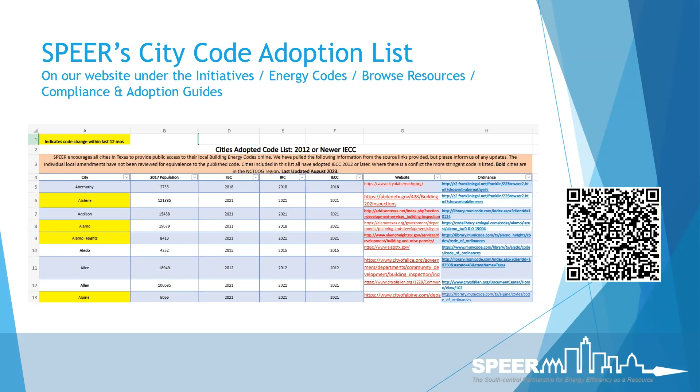So Texas, as I said earlier, is unique. We have different pathways than other states. Some of it's been put in legislation for us from House Bill 3215. We still have prescriptive. We have the total UA alternative, which is a building shell, just trade-offs for windows and insulation values to reach compliance for the code. You have total building performance. We have the ERI, which is just a sliding index, a 2-digit sliding index that gives compliance for the code. We have Energy Star, which is also in the legislative words that says it also can supersede the code.

Right now, currently, Texas is on 3.1. If a builder is doing Energy Star for the 45L tax credit, which we'll talk about a little bit later, in order to continue and get their tax credits, this is my understanding, and if someone's on the call and they want to correct me if I'm wrong, the house has to be completed prior to January 1st of 2025 to get that tax credit. If you have a project that's starting and it goes beyond that date, you'll have to already be on 3.2 for compliance for your tax credits. That doesn't mean a city has to say that they're not compliant. That just means that if they're going to get the tax credit, they're going to have to update to 3.2 if it's going to go beyond the January 1st date.

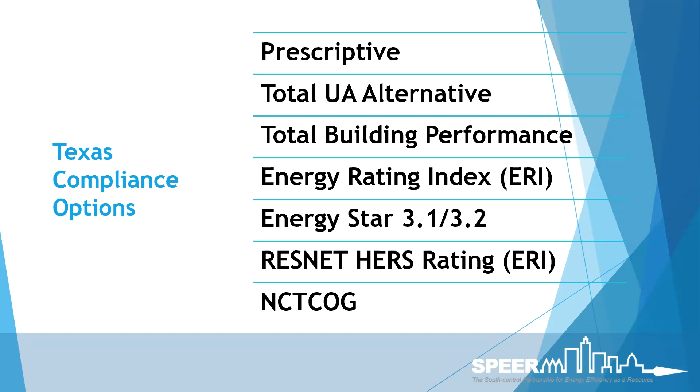We also have the RESNET HERS rating, which is technically the same thing as ERI. And then we also have the North Central Texas COG, and we'll talk a little bit more about that later. So as you can see, we have way more compliance pathways through the code than is just written in the book. So Texas gives that flexibility.

As I just said a minute ago, House Bill 3215 did allow the Energy Star and RESNET HERS index to be a compliance pathway. I'm not going to go deep in the weeds here, but there's still some confusion about, well, if the city has adopted 2021, how are we going to make sure that Energy Star is compliant? Because Energy Star 3.1 has a backstop that's older than the 21. We have some cities that are pushing really hard back, saying, I don't care that you're Energy Star, you're also going to comply with 21. That adds a lot of confusion for the building industry. It adds complexities and additional construction costs. If you have specific questions about that, by all means, put it in the chat or the Q&A, or use my contact information at the end and let's discuss it in more detail.

So it always comes down to the city having final jurisdictional say. They can decide what they want to do. They can amend the code how they want. But if they've already adopted the 21 without understanding the complexity of what Energy Star does and doesn't do, and you don't already have an amendment in place, it's kind of tough to enforce that. Even though, and again, I won't go deep in the weeds here, Energy Star's checklist does show that the more stringent measures should apply. And in that wording, it should mean that the 21 requirements have to apply to an Energy Star certified home. But just about all the cities that I know of in Texas that are on the 21 are allowing an Energy Star across-the-board compliance pathway without adhering to the updated 21.

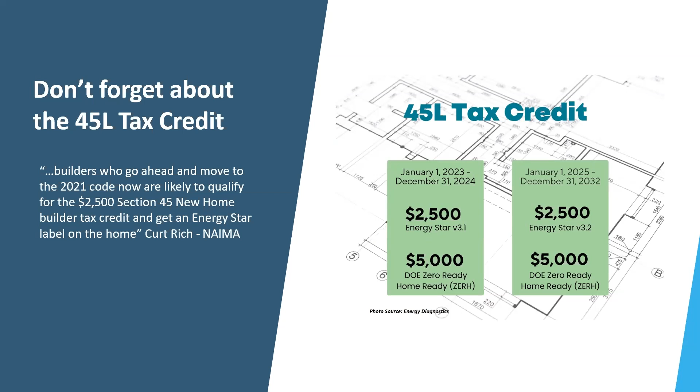They've added some flexibility in there that can actually push the builder through and still be certified. So I like to see that. But the one thing that we did ask of the EPA and just said, hey, can you help us with this? There's confusion in Texas with the 21 and, you know, what compliance measures do we need to do? They did some analysis. They did one in Houston, one in Dallas, one in Amarillo. They did both gas and electric only.

So even though they're not going full force and being enforced to do the 21 requirements like R8 ductwork and additional measures of the 21, they're still more energy efficient than a code built house, and that is the older 3.1 version. Even though the backstop is 2012, it's still showing that it's more energy efficient.

We picked those three cities. They are a good representation of a dry climate and then a humid climate and then a very humid climate for climate zone 2. And so 3 different climate zones were represented there.

But that gives us a good indication of, again, we can talk about this offline with city specific, but if you're in the 21 cycle already, there's really not a reason to force a builder that's doing Energy Star to go up to the 21 level yet. They're going to get there anyways with the 3.2 if they're going to continue the tax credits. So we have a very short window of how do we navigate this?

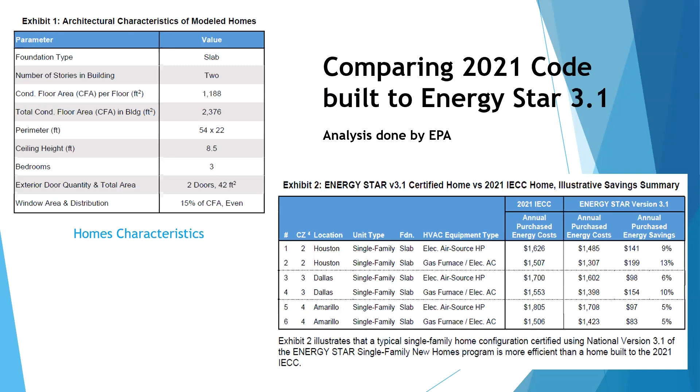But with all that, the HERS, the ERI, the performance, Energy Star as well, you're going to need software to do that. So prescriptive and total UA, you can use a REScheck. That's the free one that's online.

There's always questions that come up to say, well, who's allowed to do that? Can it be the builder? Can it be a third party? Can it be the HVAC contractor? Again, that comes down to the city's interpretation and enforcement for that. It says the code official has approval of who actually does this. So if the builder, and you think the builder understands building science enough to actually build an energy model, just look at that. We'll talk about what those look like in a minute and what's important to look at for the reports. That's pretty much what some of this webinar is for today.

But REMrate, Ekotrope, they're a paid service. You have to pay a licensing fee for that. It's much more granular. It has a lot more trade-off options. So most of all the national builders will go Ekotrope and REMrate because it gets them the lowest construction cost for meeting code compliance.

REScheck and IC3, there's differences between the two. We'll talk about those in just a second. Some of the engines, the way they're built, they've tweaked them both, and so there's more importance leaning towards one way or the other. So we'll just get right into it. It's harder to explain that way, but we'll just start out with REScheck.

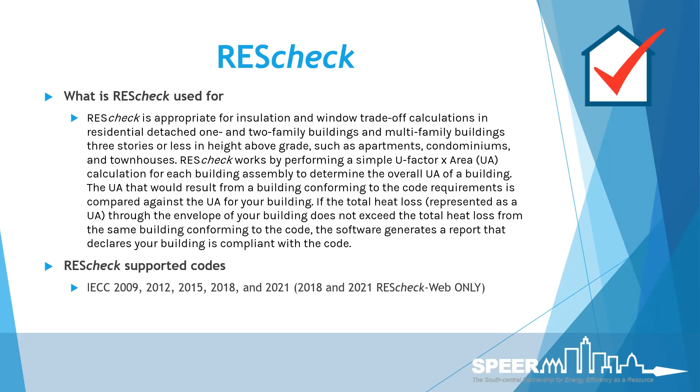That newer REScheck is going to allow you to have project sharing. That way, everyone that makes changes will be able to see it in real time with someone else making changes. But one important thing to note is this actually pulled up a notice, and I thought it was interesting to put this on here. As it says, compliance with the 2021 IECC Energy Code can be demonstrated using the total UA alternative or performance alternative. However, neither of these alternatives allow credit for high efficiency mechanical equipment.

And then in red, electrical resistance heat cannot be modeled with the performance alternative, so the total UA alternative must be used. So if someone's going with the heat pump, that changes what can be used to model this. That's why I get a lot of calls from people: hey, I'm using a gas furnace and I can't get it to pass. A lot of it has to do with the way it's being modeled and what you're actually using. I said that backwards, I believe, but if you're using a heat pump, it's getting harder to get it to pass because certain pathways won't use that calculation. So just take note of that as well.

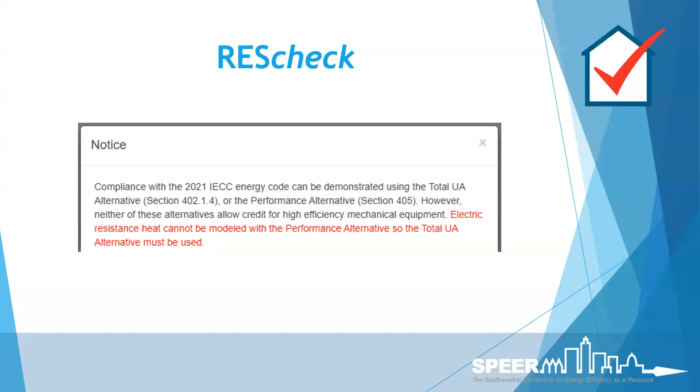So looking at the energy reports, we're going to point out what's important and, for plan reviewers and permit techs, what am I looking for to say this is right? If it has a big green bar at the bottom saying passes using performance alternative, there's still things you need to look at: is this actually the same house? Are they using the right energy code? Is the location correct? And as you see, orientation says building faces 270 degrees from north. So it's not giving an exact, it just says this is its way from north.

Looking at square footage, how closely is that correct when you're looking at the plans? Sometimes it could be off. Then it shows the glazing area, and specifically, what climate zone are you in? So if someone's doing one for Dallas, which moved in the 21 from climate zone 3 to climate zone 2, are they using the correct climate zone? Once you put location in, it's going to tell you the climate zone. But if location is off, that's a big no-no right off the bat. That's a telltale sign something's not correct.

But as you see at the bottom, it's 0.4% better than code. We'll talk about the chapter 4 stuff, but in this house specifically, I just threw numbers at it, and I'm 0.4% better than code. If that insulation is installed in the walls poorly, and I go from a grade 1 to a grade 2, this is no longer passing. Because it's that close to compliance, poorly installed insulation is now going to fail that.

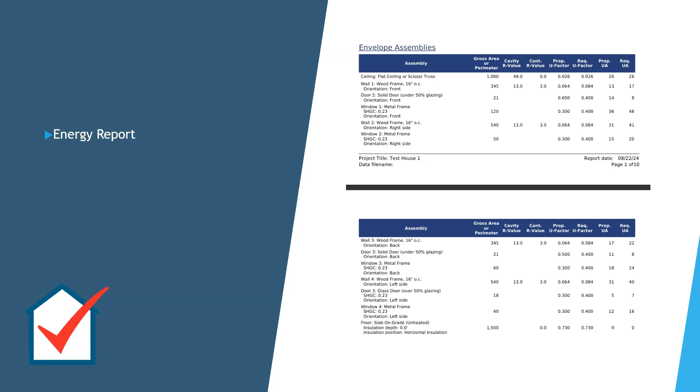Without looking at this detailed list, you just don't know. And then last thing, you can put mechanical equipment in here. Just verifying the AFUE: this is considered a gas furnace, but if the AFUE is 90% in what they installed, but they modeled it at 80, that still means the model should be updated. It's not going to fail because that's higher efficiency equipment, but is there something else they could have traded off to make the cost of construction lower?

Air conditioning, 17 SEER. I've heard a lot of times they're throwing high SEER equipment on the model, but they're not installing it because it's too expensive. As you notice here, you don't see tonnage. I've also seen where a 4-ton was supposed to be installed and they instead installed a 3-ton because they bought cheaper equipment. It's not showing it in the model. So it's something to look for closely.

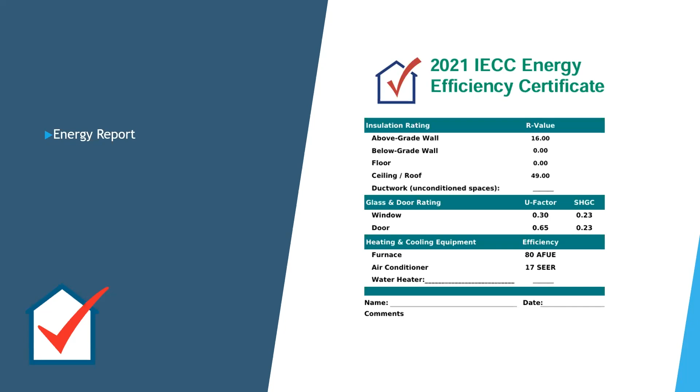And then, of course, it lists the efficiencies of the equipment. And on the water heater, it leaves blanks there so you can fill that out. So again, if you have specifics and want to go deeper into REScheck or IC3, I can help the plan reviewers or the permit techs, and we can meet online through a Zoom call and talk in depth about what's important to look at. We don't have a whole lot of time to dig through every single part of that.

But the IC3, this is Texas A&M's version. It's the International Code Compliance Calculator. It's a performance-based residential energy code compliance tool. I'm still surprised that there are some cities that have not really heard of the IC3. It's rare, but it's still out there. A lot of them know what REScheck is. They know that they accept REScheck. It's in their code of ordinances, but they're not really sure what IC3 is. It's a Texas-based thing. But what is this? What does it mean by having a compliance tool?

So it's the same as REScheck. Its one and only job is to compare the annual consumption based on the calculation that is based on the heat load in and out of the building. So you're looking at the building shell, and you're looking at heat load that comes in, and how do you condition that to offset the load coming in or out of the building, and you look at how much that annual energy consumption is and compare it to a referenced house to say, this is where it should be, this is where I'm at, am I equal to or less than, am I compliant?

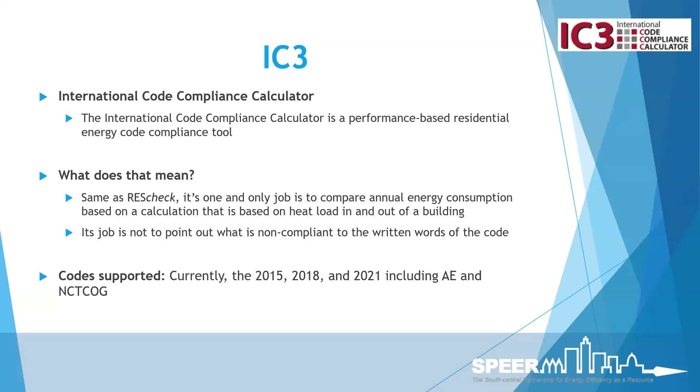And then the current codes that are supported are currently the 15, the 18, the 21, Austin Energy, and the North Central Texas COG amended code. So REScheck doesn't have that listed in its library, but IC3 does. So if you're a North Central Texas city, or any city in Texas can adopt the North Central Texas COG amended code, and you can use that, but you're going to now have to ask for an IC3 instead of a REScheck for compliance because that's in its library and has the calculations.

So with that being listed, here's kind of what we're looking at. I misspelled that, sorry. It's NCT COG. It's the North Central Texas Council of Governments. It runs analysis every time a new code cycle comes out. They create an amended code that still shows compliant. What they're really doing is tweaking numbers here and there. They're making it easier and better for the building industry to still be compliant with code, because all you're really looking at is what's the total consumption of energy when you're comparing it to a reference home, and am I equal to or less than?

So with that, the biggest changes that you see here for climate zone 2 and 3, they did move ceiling insulation down to an R42. The fenestration U factor went up to a 0.32. The wood frame walls for climate zone 3, they took it from a continuous R5 down to a 3 continuous. And then of course, slab edge insulation, majority of climate zone 3 has removed that due to an exception that says if you're in a high termite area, you don't have to do it. But North Central Texas COG just amended that out and put 0.

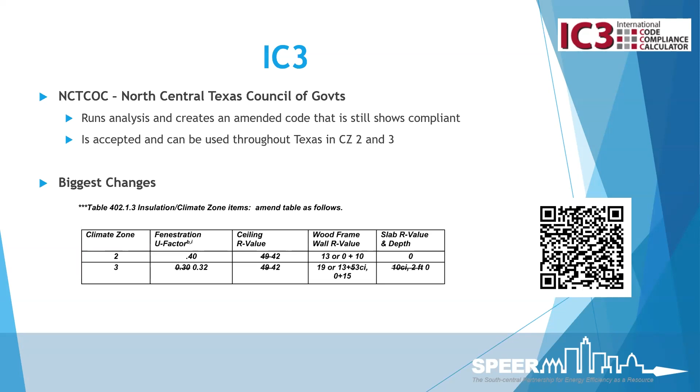And I did also put a QR code here. If you wanted to QR code that, you can look directly at the North Central Texas COG amended code, and you can read more into that. You may be able to pull some things out of that that look important for your city. If you're going through that adoption, you can just look at it and have maybe some amendment ideas. But overall, in my opinion, it's a good way to go through an exception and get the building industry where you have less impact to the construction costs. And as you go to their website, it will say that any city in Texas can use that. They also have forms for compliance that are editable, and you could put your city's logo on it.

I mean, these reports give you that. So you can use that as your metric when you estimate how much single family has been built in your city. You can look at these reports and start adding that up and make a really good estimate and a proposal of, this is how much was saved since we've adopted the new energy code. And of course, the authorized signature needs to be on there as well by who actually did the report.

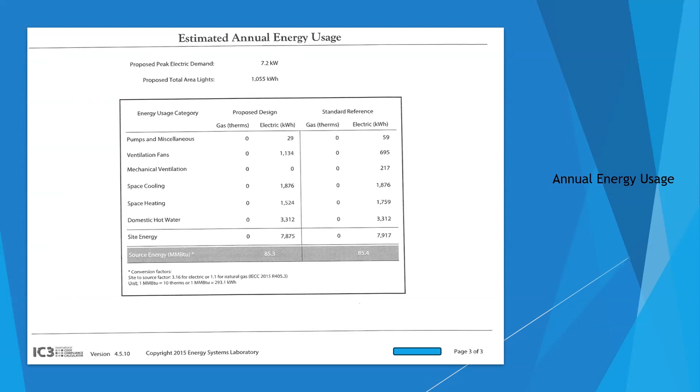Standard reference is showing 217 kilowatt hours. So to me, that's a red flag. You have to have mechanical ventilation. How are they doing this without energy? That's probably not happening. As you see at the bottom, it says 85.3 compared to 85.4. If I added 217 to that mechanical ventilation, we're probably no longer compliant with the code. So what is their strategy, and how are they getting there without energy?

Another project here, I won't go through all this again, but as you see, mechanicals, blower door testing at 3 ACH, that's more like it. Ventilation rates 180 for mechanical, using 8 hours a day with 12 watts. 12 watts, in my opinion, is a little bit low, but they're estimating at 12 watts. How are they doing that 12 watts? They're showing a duct tightness of 88. To me, this is a more honest approach for the report, and not just throwing numbers at it, trying to get it to pass.

That's just my opinion. Again, I don't know this one for a fact, but there's still always things that hide in these reports. Same thing with this estimated annual energy use.

We're passing. As you see, at least they put a 35 on the mechanical ventilation, and the standard reference is showing 234. They had a lot of wiggle room. They're way under on code. As we see here, compared to the standard reference, they had some wiggle room for that. So if they put a mechanical ventilation in that's using more energy, and let's say it's 180 instead of 35, they still pass because they're under that 234, but you'll have to rerun the numbers just to find out.

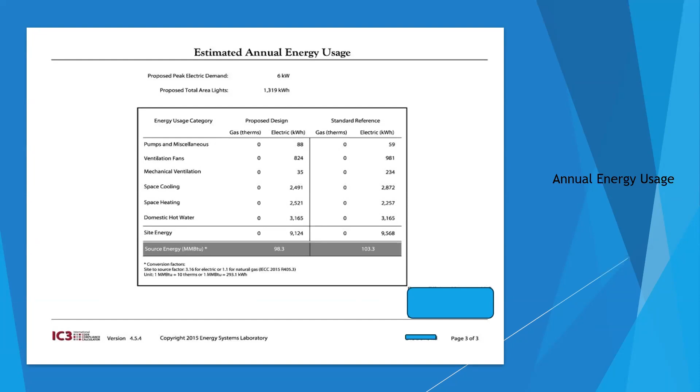Again, if you have questions with that specifically, we can talk about it more offline. You guys can call, we can do a Zoom call, we can talk about specifics. We don't dig into who the builder is. Just show me the report. Let's talk about what is important to look for, and what you're going to see in the field for compliance.

And now the Chapter 4 key updates. We've gone through this before, but like I said earlier, there's a lot of cities that are now adopting this, that are reaching out to us asking questions. But this is the additional efficiency packages. It's enhanced envelope performance. And this is what the gentleman said earlier about how some of them are giving credit.

IECC is where it probably shouldn't, but more energy efficient HVAC equipment, reduced energy water heating, a more efficient duct thermal distribution, like putting it in conditioned space, and then improved air sealing and a more efficient ventilation, like using an ERV, not just a duct on a return plenum. So those things you can do.

However, with that, it's based on compliance path. If you're doing prescriptive, you need to pick one, and one must be installed. If you're using performance, you can pick one, or as long as your annual estimated energy cost is 95% or better than the reference, then you don't have to pick one of these options.

And a lot of times, as we noticed on those two that we looked at, most builders will only just barely meet the code. So to get them to that 95, they're doing more insulation, better windows, lower duct leakage, more duct insulation, lower ACH for blower door. They're doing something to get equal to or better than 95%. And then they don't have to pick one of those. If the builder's already using a tankless water heater, they're already there.

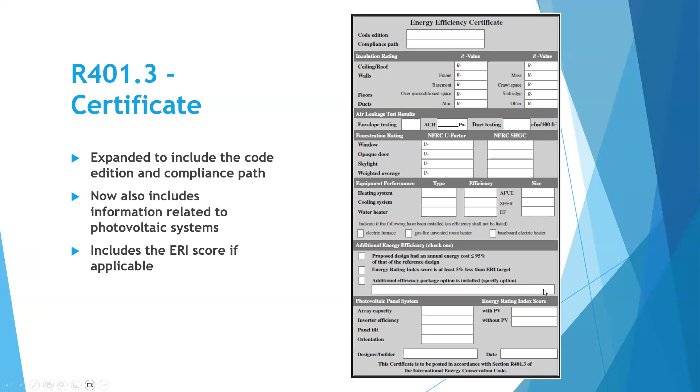For the efficiencies, I can do that real quick. Let me go back to that. So good question. So enhanced envelope performance is using the total UA, sum of U-factors times the assembly, that's less than or equal to 95% better. It's an area weighted average for the SHGC. It's also 95% or better for the SHGC. That's an enhanced envelope.

So better windows, better insulation. The more efficient HVAC, you're looking at heating and cooling equipment must be greater than or equal to 95 AFUE for gas furnaces and a 16 SEER AC, or a 10 HSPF for heat pump and a 16 SEER AC. And then it says or greater than or equal to a 3.5 COP for ground source heat pumps.

And then option number 3, reduced energy and service water heating must meet either greater than or equal to 0.82 EF for gas or 2.0 EF for electric or a 0.4 solar fraction for solar water heating systems, which we don't really see around here.

And then option number 4, more efficient duct thermal distributions. It says must meet either 100% of the ducts and the air handler is entirely within the building's thermal envelope, or it's 100% ductless located inside the building's thermal envelope, or 100% located in the conditioned space as defined by a specific section in the code.

And then the last one, measured air leakage rate, ACH, is equal to or less than 3. So if you're in a climate zone 3 or climate zone 2 that allows 5 ACH, then if you're going to choose option 5, you got to hit that 3 ACH or less. But that's also with an ERV or an HRV.

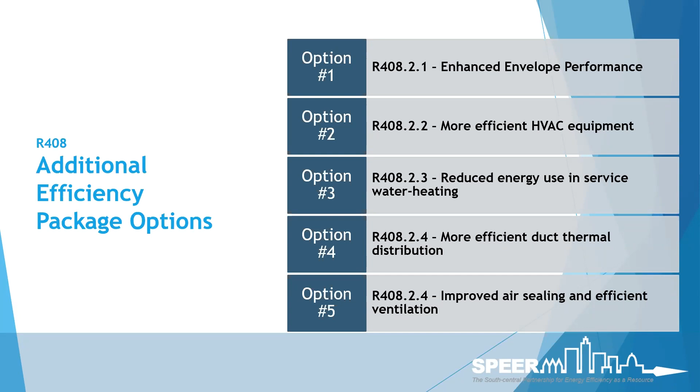And then it says with specific requirements for the efficiencies of the ERV and HRV, which the majority of them out there that I've seen meet that efficiency requirement. So that's just power draw compared to CFM that's coming in. So that's a fan efficiency for that. So hope that helped. Great question. I appreciate you asking that question.

Attic eave baffles, really the only thing that changed here, and what I wanted to point out is now, even though in 2021, if you have an intermittent venting system, you have to still have eave baffles in every single cavity. Prior to 21, you just had to have it adjacent to every vent. So if you have an intermittent venting system, then you just had to have one adjacent to each vent. If it was continuous, of course, you had it in every single one, but now it doesn't matter. They all have to have it in every cavity.

But as you notice in the picture, my important thing to tell a lot of them is it needs to be installed properly. It needs to be stapled to the front, pushed to the back, allowing insulation to sit over the top plate. Here it shows spray foam sealant all around it. I've never really seen anybody do that, and I don't think a city's going to call that out and say you need to do it. I think it may be a little bit overkill as long as it's filling the cavity.

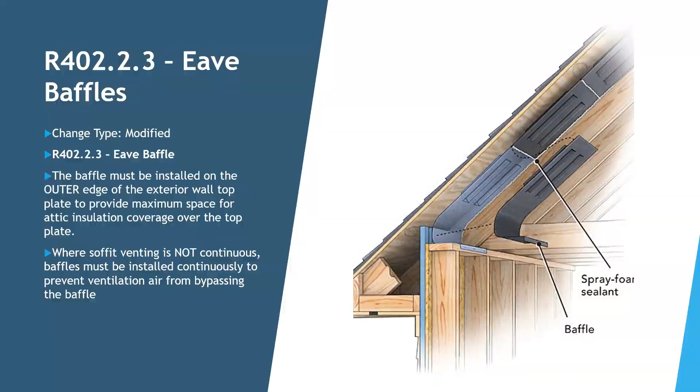What I'm seeing is a lot of them are putting it in every cavity, but they're breaking them in half. And in my opinion, you're not meeting the intent of code. In this picture, it looks like it's a half of a baffle. Most of the time, the baffles will fully fill each cavity. If it's a 24-inch on center, it's fully filling that. If you have framing that's a little bit less, then you can break it in half. But they break it in half anyways, and they don't fully fill that cavity, which means you're still getting wind washing. If air moves through insulation, it lowers its R value. It compounds the problem.

I'm really behind here. Sorry, we spent more time on that. So I'll probably just continue if that's okay.

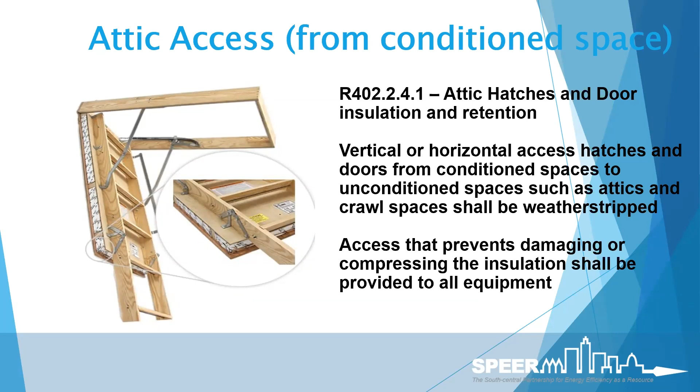So attic spaces, attic access hatches and doors, insulation and retentions. So vertical doors, horizontal doors need to be insulated and weather stripped. And then, of course, what's brought into this in the 2021 is now insulation damming, having damming up on ceiling height changes, and then ceilings that go from over-conditioned to over-unconditioned need to have a dam so you can fully fill that insulation to the R value required all the way to the outer edge of the top plates. That's now required as well.

It can be made out of anything that's a permanent style material. My opinion is it really shouldn't be T-ply unless it's framed properly. It shouldn't be cardboard.

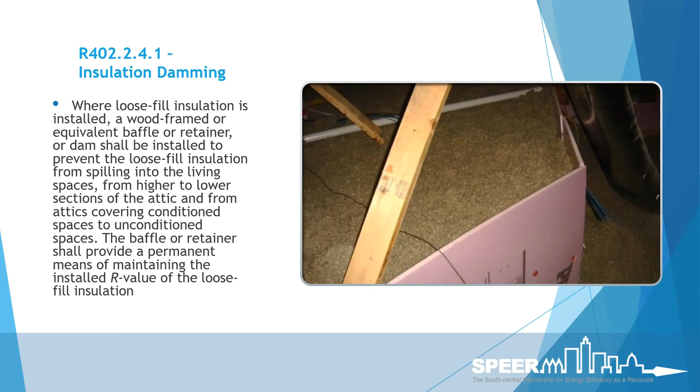You can use house wrap if it's framed properly. It needs to be something that's going to be permanent, not something that's going to fail over time. And as I talked about earlier, if you have just one slip in the way things are installed, it can fail code because I'm only 0.4% better than code.

Now we've got insulation grading. This is where third parties come in to say, this is what we do on a daily basis. We're looking at how well the insulation is installed, how much in gaps, how much in compressions. And as you see real quick, I won't go through every single one, but even an R13 wall, 2% gaps, its effective R value is now R11. So you're reducing its effectiveness, which is not what the code needs to happen.

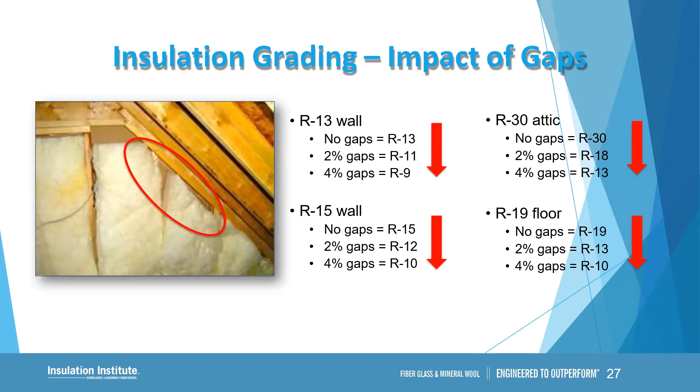So they're asking you to do it per manufacturer's installation instructions, which is what this is right here, directly off Owens Corning. I won't read all of it. It's kind of blurry, but it says insulation should fully fill, fit snugly within all framing cavities with no voids, no areas of compression, no gaps between insulation and framing members. That's absolute perfection, which we don't normally see in the field.

And with that example we had that was 0.4% above code, if we actually used the model and we said, yeah, they're doing it per manufacturer's instructions, that's grade 1. If it's now poorly installed with voids and compressions and gaps, it's probably not passing code anymore. But you can't figure that out unless you actually run a model to figure it out.

I have a question here. See, hold on. We have one here. It says, please advise cities that might want to adopt the 2024 to wait for the software updates. Yes, that's a great point, Maston. Thank you. When IC3 and REScheck are updated, they have to wait for the code to come out. Once the code comes out, they start actually trying to build the new model.

I know IC3 is also being updated for its reporting capabilities because Austin asked for that because there were some areas of concern with that. So they're tweaking the reports. They're also going to have to now build a reference home using the 24 requirements. But they can't do that until the final draft gets out, which is now out. So they're now actively working on getting it done.

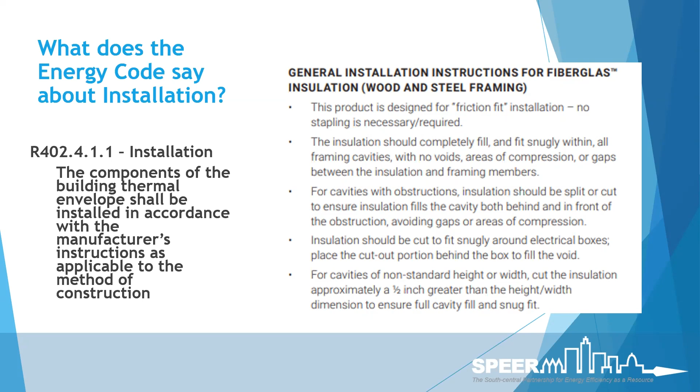So insulation, back to that. We'll just spin through this real quick. I know if you've been on here for a while with us doing other webinars, you've seen this, but what is grade 1? With this, you see the sheetrock on the front, top right. In the lower left, you see OSB. You've got 6-sided insulation happening. It's got an air barrier on all 6 sides, but you see a little bit of areas of compression.

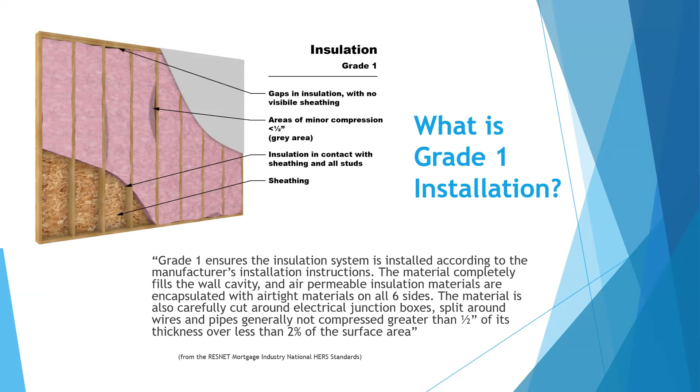So RESNET helped define this because we know that perfection doesn't happen in the field. They defined, okay, up to 2% should be allowed for minor compressions and a little bit of gaps. And if you see that, we're still calling it a grade 1. So does that meet the intention of manufacturer's instructions? We say yes, it does, as long as it meets these criteria and looks like this.

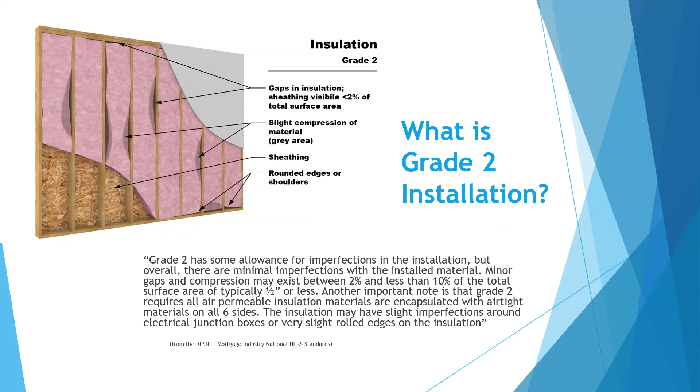This is what I normally see in the field that is still called out as grade 1: more than 2% of it's compressed. There's a little bit of gapping at the bottom. It is 6-sided encapsulated. There's an air barrier on all sides. So to me, we see grade 2 all day long, but we don't normally update it, and everyone just says, oh, that's still grade 1.

And then grade 3, it's really bad. It's poorly installed. There's gaps. There's insulation missing. There's lots of compressions. If it's not 6-sided encapsulated in some places, it's automatically a grade 3. If air can get through the insulation, it's a grade 3.

The 2024 is addressing the knee wall issue, but there have been a lot of arguments about why the knee wall needs to be encapsulated. It's in the attic. Why can't I just put insulation on it and just point it towards the back of the unconditioned attic?

2024 now says it has to be also encapsulated with an air barrier on the backside, because what you're trying to do is stop air movement through insulation. If air is allowed to move through it, the R value plummets. So you're trying to avoid that by closing it in on all 6 sides.

So as I said, thankfully, finally, the 24 is going to address the knee wall issue. Most national builders are already doing that because they've been asked to do that by the third parties. There's still the custom home builders that just don't do it. We get up in the attic, we look at it, we see insulation facing us on a vertical wall. That's automatically a big no-no that needs to be encapsulated all the way around.

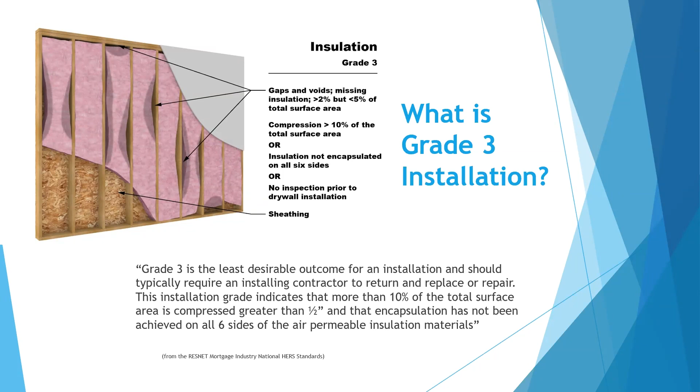So I've shown this one before, but looks can be deceiving. It needs to be effective. This is just a small wall that's above the fireplace. As you see on the right and the left, it's blown wall insulation. That's grade 1 in most cases all day long because they fully fill the insulation into the cavity, and it's got the right R value to it. But over that fireplace wall, it was supposed to still meet that R15 like the rest of the house.

But me looking at this, there's something that's wrong with this that just caught my eye. The framing for each stud is turned on its wide face, not on the short face, which tells me that's only 1.5 inches thick. If it's only 1.5 inches thick, how is it still R15? And so what we found out was they just tore the batts in half and put half on one side, and then they forced the labeling to be out on the other, hoping that nobody would see it, because in their opinion, as long as it's labeled R15, then that means it is R15, which isn't true.

The label's there for the manufacturer saying that's what it's been tested and rated as. If you compress it, it's no longer that. If you tear it in half, it's no longer that. If you let air move through it, it's no longer that. So they needed to reframe this. As you see, there's a fire block at the bottom right above that fireplace. If that was a fire block at the top of this wall, then these walls don't matter anymore and don't really have to be insulated because they're considered a conditioned space wall.

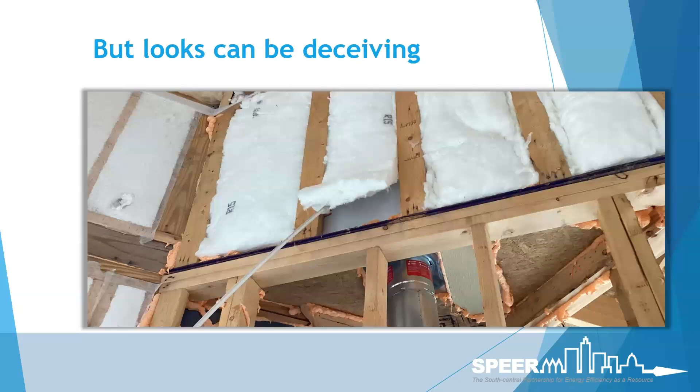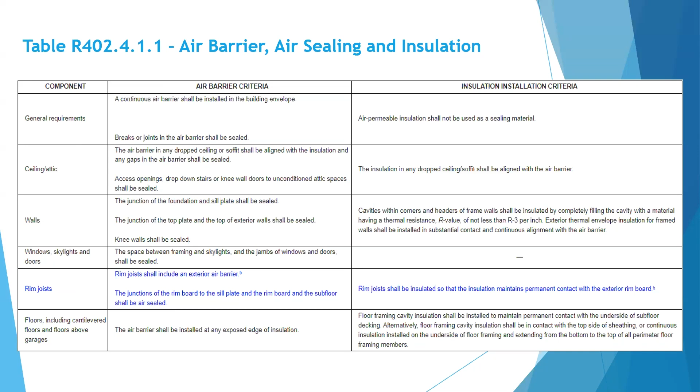So thankfully with rim joists, it now states that the air barrier must be on the exterior side. They added that. And then it also now states that rim joists being insulated must also have insulation that's permanently in contact with the exterior rim board. Instead of just being friction fitted, it has to have wire stays or staples or glue, or it's got to be foamed or something that's holding that in place permanently. And then all of this has either been reworded or changed or added.

But garage separation is a big one. Energy Star is really big about garage separation. They want to have garage separation because of contamination. The code's catching up to that. Hang on, we got a question. It says, eave baffles, can you install draft stops with a V cut instead of baffles? Great question, Moosh. And yes, I would believe so. As long as it meets the intent of moving air around the insulation, that should be considered compliant.

That to me would be fine. A lot of builders that we've seen in the past would just roll up insulation into a roll and stuff it over the top of the top plate and say, well, we're stopping the air moving through the insulation. To me, insulation cannot be used as an air barrier or a redirector of airflow.

So yeah, it just says baffles. It doesn't say it has to be a store-bought baffle. You could even use cardboard if you needed to actually divert the air around the insulation, as long as you're meeting the intent. The code is never meant to stop someone from having an innovative way of doing something differently, as long as the intent is met.

And then garage separation, I just talked about that, but the insulated portion of the garage assembly shall be installed in accordance with a specific section. So even though these tables are trying to tell you what needs to be done, they're also going to reference different sections of the book to say this is really what you need to look at to determine compliance with insulation on a garage wall.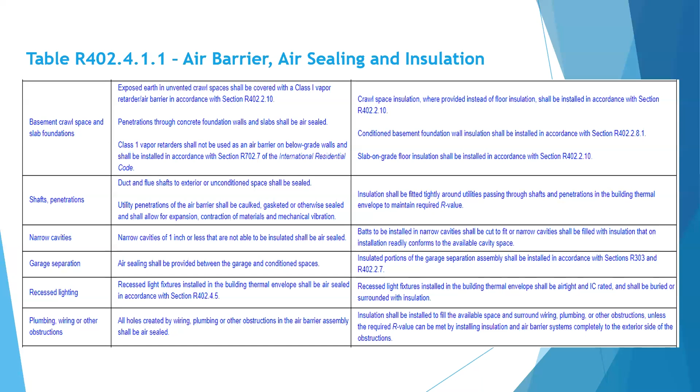You need garage separation, plugging up all the holes between the garage and the conditioned space. I'll get off that soapbox because that one can continue for a long time.

Showers and tubs, we still see this as an issue. Air barrier installed on the exterior walls adjacent to showers and tubs shall separate them from the shower and the tub, meaning an internal air barrier where the sheetrock would have been. Now that it's not there because the tub's installed in front of it, it still needs an air barrier on the inside where the sheetrock would have been. And then it says exterior walls adjacent to showers and tubs shall be insulated.

We still see a lot of times people putting in the fiberglass drop-in tubs or shower combos. They drop them in before the insulators get there, and there's no way to insulate the back of it. It's got to be pre-planned. It's got to be phased so that section is insulated first before that gets dropped in. Then there is no problem.

If it's there before insulation, they'll say, oh, we're going to get it insulated, don't worry about it. Well, I know that's probably not true. You'll cram insulation in there, but if you crush the insulation, it's reducing its performance. It should be done prior to installation.

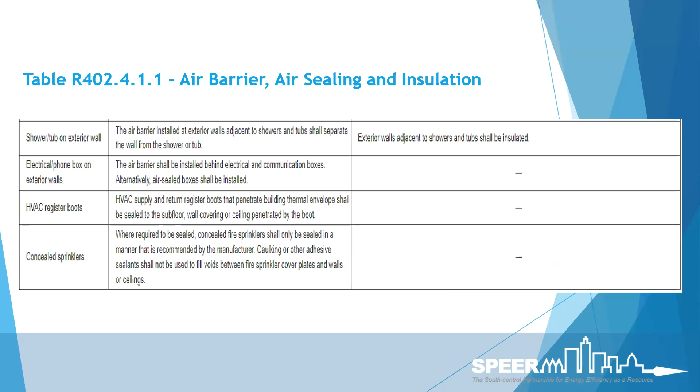Air leakage, that's the blower door test. We talked about this before, but if you're using a prescriptive path, you've got different measures depending on what climate zone you're in, what ACH. The test must be conducted at 50 pascals, which it normally always is. However, there is now an alternative way of doing this if buildings are less than 1,500 square feet. That can also be apartments.

So if you have 300 apartments and you're trying to get blower door testing done, as long as each apartment is less than 1,500 square feet, you can now use 0.30 cubic feet per minute per square foot of the dwelling instead of using ACH. Getting a dwelling smaller than 1,500 to actually pass an ACH test is going to be extremely difficult. Even when you're doing foam, it's still going to be hard to get there.

So this is an allowance to say, yeah, it might calculate out to an ACH of 6.5, but we're still passing because we're at 0.30 cubic feet per square foot. In the 2024, that drops down to 0.27. So they're basically squeezing that lemon a little bit more for efficiency, making it a little bit harder to comply, but making the building a little bit tighter. That's how they're going to get additional efficiency going forward.

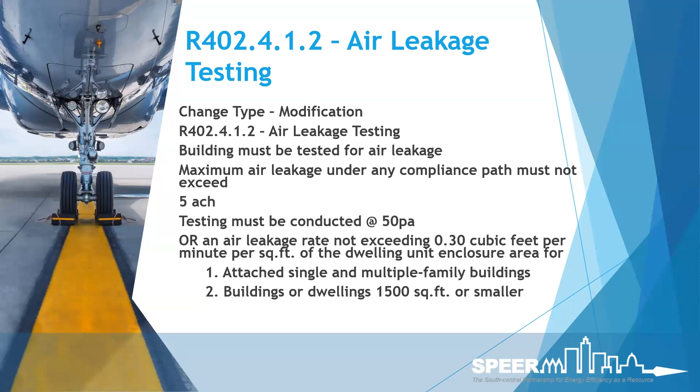And then the leakage rate, prescriptive path, you've got 5 ACH for climate zones 0, 1, and 2. And you've got 3 ACH for 3 through 8. And of course, with performance, it can vary. With Energy Star, it can vary.

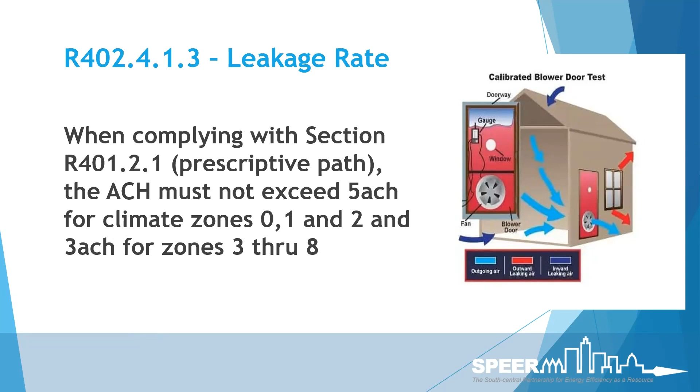That again goes back to the reporting of the IC3 and REScheck or REM/Rate or Ekotrope: what pathway are they using, and now what are we looking for in ACH when it comes down to compliance. So if they're using prescriptive, then you better see that it says 5 or 3 depending on what climate zone. If it's performance, now it can start varying just a little bit for compliance.

Electrical boxes, basically just seal your electrical boxes. Make sure the boxes are sealed, or when you're inspecting them, make sure that they're done. But I still see all the time that these plastic electrical boxes have holes all the way around them, and the only thing they're polysealing is where the wire goes. That's not what the requirement of the code says.

With this, it's saying if you're using air-sealed boxes that are made to be air-sealed, they have to have the NEMA OS4 standard on them, tested per these requirements. Most cities strike this out and just say, as long as you air seal the boxes. But just putting poly on a wire hole isn't going to help air seal the box. It's got to be on all penetrations on those cheap 5 cent, 10 cent, 12 cent boxes that are installed in the exterior wall.

And then 2021 moved into all pathways and all locations of ducts needing to meet this. It used to be if you were in a crawl space, then it reduced the R-value requirement. Now it says it doesn't matter where you're at. You're going to do R-8 for ducts 3 inches or greater, or R-6 for 3 inches or less, unless you start using buried ducts, which we're not going to talk about here because we're not really going to see much of that in Texas, but there are specifics on how to bury the ducts based on your climate zone and what insulation needs to go around or on top of them.

And then, of course, underground ducts utilizing thermal distribution efficiency methods shall be listed and labeled to indicate R-value equivalency. I had a call earlier this week from a city asking, if someone's burying it in the ground, can they just leave it uninsulated? There's nothing in the IMC or the IECC that allows for an uninsulated duct outside of the conditioned space. In the ground is not part of the conditioned space. It's outside of the envelope and still should adhere to the R-value requirement listed in this book.

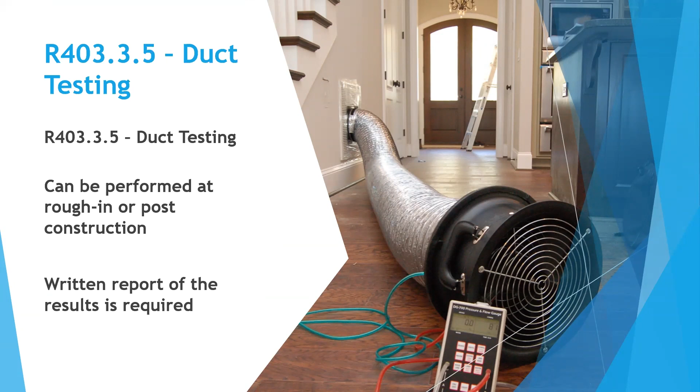And then duct testing can be performed at rough-in and/or post-construction, but a written report of the test results is required. Normally you'll get the energy form at the end for CO, turned in with a duct score and a blower score on it. You'll probably also see it listed on the electrical panel where the person tested it, with the duct score listed there, but it can be done either post or pre-construction.

And then any test being performed at any time, if it's not an encapsulated house, which we'll talk about on the next slide, even if it's post or pre, which used to be different in older versions of the code, still needs to meet the same leakage requirement, which is 4.0 CFM per 100 square feet.

So for example, an 1,800 square foot house tested with one system, the target's 72. Now say they have two systems. If you combine those two, it has to be 72 or less. So if you have one at 23, the next one has to fill in the gap, and you have more allowance, but it still equals 72 or less because the target's based on the size of the conditioned space, period.

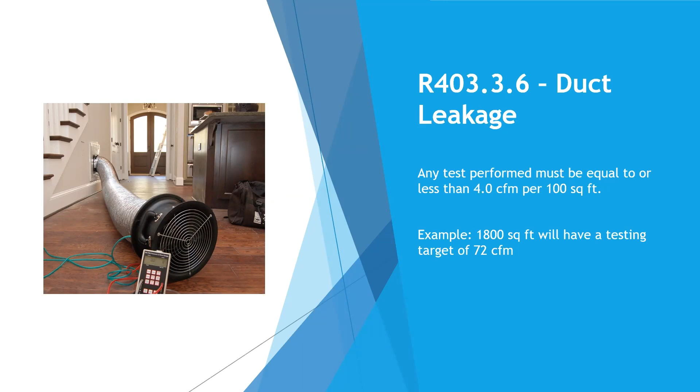And then if you're in conditioned space, on prior versions of the code you did not have to duct test it because it was considered in the conditioned space. But even though it's in the conditioned space, the leakage is now allowing for comfort issues or high humidity issues. It's just increasing energy consumption. They now said, even if it's in the conditioned space, you're going to test it, but your leakage allowance doubles. So it goes from 4 CFM to 8 CFM per 100 square feet.

So now that 72 on an 1,800 square foot house would just be times 2. It's 144 that is now allowed. However many systems you have to do that with, the house itself needs to be that or less.

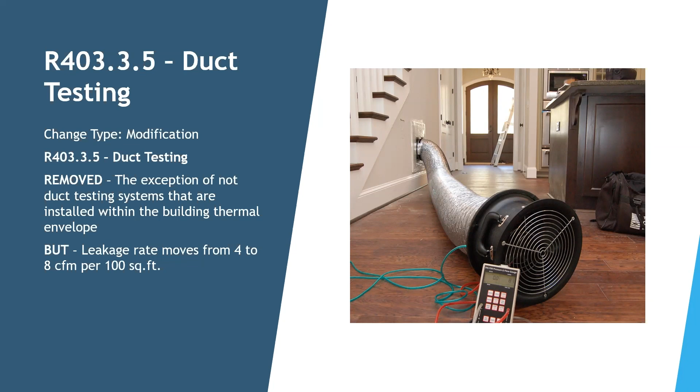And then mechanical ventilation. We've done independent webinars on this and gone into more depth with that. If you want to go look at that, it's on our YouTube channel. But I still get lots of calls about this. I'm out walking sites in cities that have adopted 2021. Everybody's either, oh, I didn't know that I was supposed to do mechanical ventilation. Now, how do I do this at final? It's just an afterthought. The cities are not used to making sure it's there.

It's been in the code since 2015. It's now required to be tested by a third party, but it's been in the code since 2015. They needed to have some form of mechanical ventilation. And of course, testing is now being performed. It's kind of vague on how you test it. It gives things that you can use, but there's no consistency across the board on how it's to be tested.

I also keep hearing, well, the houses are in climate zone 2, so we're 5 ACH, so they don't need mechanical ventilation. I've read the book over and over again, front and back, and tried to find where it actually said that. There's nothing in there that says that. It says mechanical ventilation is now required. It's not based on how tight the house is.

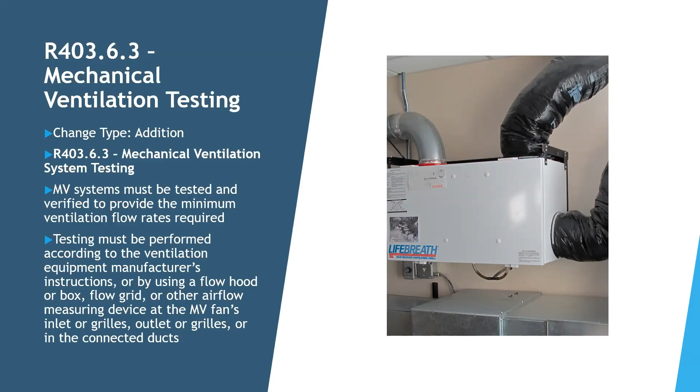And if someone wants to correct me if I'm wrong, but I've looked at the IMC, I've looked at the IRC, I've looked at the IECC. There's nothing in there that says, well, if you hit 4.5, you don't have to have it. It's just you have to have mechanical ventilation. It's not based on how tight the home is. And then all residential multifamily dwellings required to have mechanical ventilation must meet the requirements of the IMC. That's what the IECC says. And it's, of course, based on the CFM required. And we'll talk about that in just a second.

But you can do exhaust only, you can do supply only, you can do balanced like an ERV or an HRV, or a hybrid of both exhaust and supply, which I've seen out there from specific manufacturers that have now electronically tied in the bath fans and kitchen exhaust so that when the fresh air comes on, it actually turns on a bath fan so that it equalizes the pressure inside the house.

As you see, it's got a cartoon illustration here that's just showing if I exhaust only, I'm actually depressurizing the house. If I supply only, I'm actually pressurizing the house for a brief span of time. There can be consequences of pulling things into the wall if you exhaust only. That's why it's not a good strategy on the humid side of Texas. It's not a good strategy to use bath fans and kitchen exhaust because you're pulling unconditioned air and humidity through the walls.

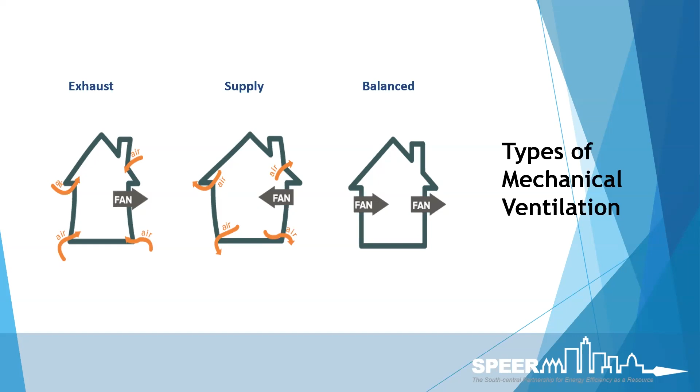If you're in Amarillo or Lubbock or El Paso and you're in a drier area, you can use bath fans and exhaust. And again, I'm not going to go deep in the weeds with that, but a manual off and on switch on the wall for the homeowner does not meet the intent of mechanical ventilation on a bath fan. It must be autonomous. It needs to run on its own. It needs to have a switch that can be an override for maintenance and or replacement, but it should not be up to the homeowner to flip it on in order to get that. It needs to be done automatically.

So with that, I just pulled off the website a few that we normally see in the field. On the left, you see a Honeywell Y8150. You also see the same version of that with AprilAire. They have controllers.

It's a simple duct damper that's electronically off and on. So these boxes, the little square boxes that you see, have dials in them that dial in the right calculation for ASHRAE 62.2. And then it says, okay, you're dialed in correctly. That's what you should be getting for this size house with this number of bedrooms. But it doesn't tell you that that's the CFM coming in. That's why the 2021 now requires it to be tested: you have to verify, is it meeting the requirement?

And then in the center, you see that's an AprilAire standalone fan box. This one's a pigtail plug-in. There's also something you can hardwire. That box can also be calculated for runtime based on square footage and number of bedrooms. Still, it doesn't tell you that that's what is coming in. You need to measure that, and then there'll be a calculation based on static pressure to say that's the equivalent CFM. That's what a third party's doing to test it.

And then Broan makes one on the right, and there's also one from Q-Fresh. There's also now one from Field Controls out there. These things are less than 25 watts, and that's why they've been brought out, because in the IECC 2018 and 2021, you now have penalties against using the air handler for its fan source.

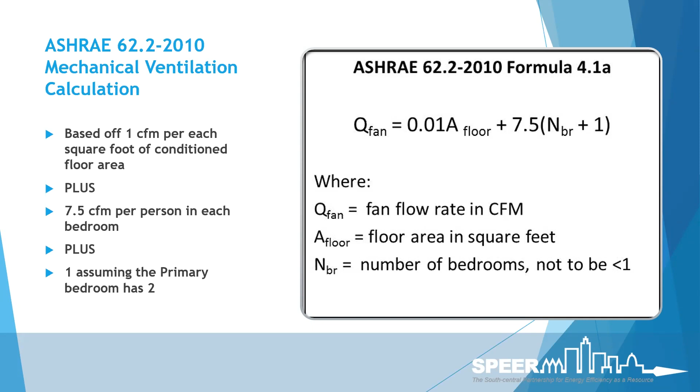So just real quick on the ventilation, this is kind of where the calculation comes from. What does this house need for CFM and mechanical ventilation? It's 1 CFM per conditioned floor area and 7.5 CFM per bedrooms plus 1, or number of occupants. So that's kind of hard to always hit. So the IMC and the IRC put these tables in that said, let's just go on this table: if you have 2,000 square feet and 3 bedrooms, you're going to need 60. But this is 24/7, 365 days out of the year. This is a continuous ventilation requirement for that building.

If they're using a standalone fan or the air handler, 9 times out of 10, those things will not run continuously. They will be intermittent. So now you have to look at the bottom table and say, I need to estimate how often this runs to know how much CFM is actually needed to be tested. So if the same example is 60 CFM, but it only runs 50% of the time, 30 minutes out of the hour, I need to test it as a third party at or around 120 CFM when it comes on.

If you're not there and you're at 85, then you're going to fail the test, which means you failed code, which means you don't comply with the ventilation requirements of the building, and you don't pass the code. That's why it's important now to make sure these things are tested. It's easier to test a standalone fan because they have test ports or taps where you can read static pressure.

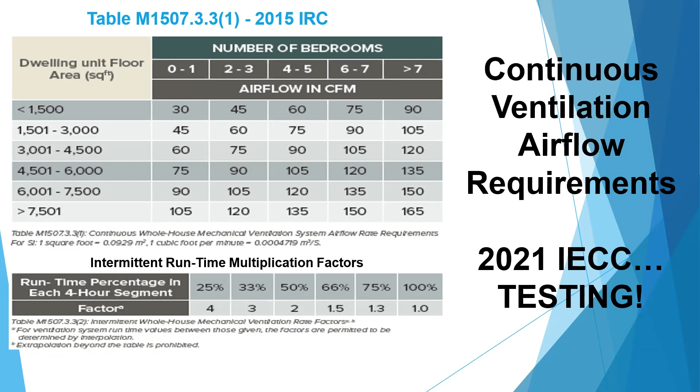The Y8150, the Honeywell version, and the AprilAire version of the Y8150, you have to end up cutting into the ductwork to actually verify airflow. And HVAC contractors don't like to see that. They don't like to hear that. But unless they want to put in a test station for testing, that's really the only way to verify it's compliant.

And then mechanical ventilation, I said this a second ago, but the air handler is now put in this fan efficacy table, stating that regardless of airflow on an air handler, if I'm pulling in anything, I need to hit 1.2 CFM per watt draw in order for it to meet the efficacy. And more than likely, probably 99.8% of the time, if not 100%, using an air handler to pull in fresh air is going to fail the efficacy, which means you should not be using an air handler.

That's not something that can be calculated in IC3 or REScheck. It's not something that's going to be in there to throw up a red flag and say, oh, you failed this. It's actually asking, are you using the air handler? And then it's going to give you a warning when you're building the model: hey, your fan efficacy isn't hitting this, so it wouldn't allow you to pass. But that's what you've got to look at.

That's why I say a lot of people put in the balanced, because that's an ERV, and it's a standalone fan pulling in a lot of air with very little watt draw, meeting the efficacy. But that's not what they're going to install. Those things are costly. They're expensive. They're not going to install those.

So what they're going to install is just a 6-inch duct on a return plenum, drawing that air handler as its fan source with an increased amount of CFM. I mean, a very little CFM with a full increased amount of watt draw. 2 to 3 to 400 watts to pull in 60 or 80 CFM is not going to meet the fan efficacy. Which, from a code official standpoint, if you're in the 2021, to me, it's a red flag on site.

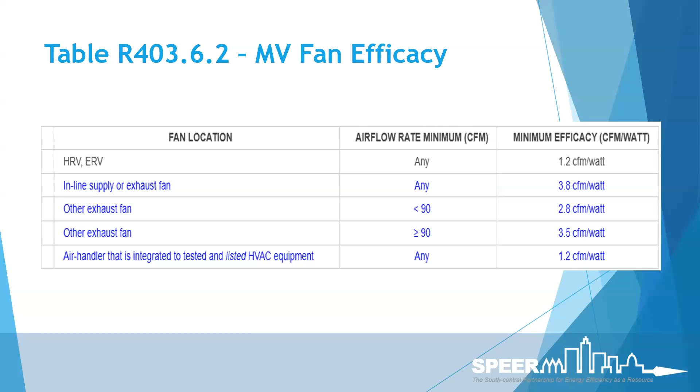If you see a 6-inch duct with a damper attached to the return plenum, you need to know how that model was created and how they're complying with code using the air handler as a fan source. That should be something that you look at right off the bat. You could do that at pre-drywall once they drop in the mechanicals. Look for where is the inlet for that, and then what are they going to be using to actually use that as a fan source.

And with that, we talk about mechanical ventilation best practices. These are actually in the IMC. Most of them are listed in the IMC, but the air intake should not be pulling from crawl spaces, attics, garages, adjacent dwellings. It needs to be at least 2 feet or more off the ground or off the roof deck.

I still see a lot of the times, I say, where's your mechanical ventilation? Oh, it's right here. It's a 6-inch duct. It's going out the roof. I walk outside and look, and it's just an air hawk or a turtle box. That's not compliant to code. That's not best practices. IMC specifically says it needs to have a 2-foot stack, or it needs to come off the sidewall. So that's contamination from the shingles. Once it heats up, it's going to suck back in that contamination directly into the house. It's a big no-no for Energy Star.

It's not necessarily in the IECC, but it is in the IMC, which the IECC says reference the M1505 or 1500 chapter for correct installment of mechanical ventilation. That's where it says 10 feet or more away from a contamination source, 3 feet or more away from dryer exhaust vents. And of course, inlets need to have a rodent screen on it.

Some cities also have ordinances specifically against putting them over windows because they see that as an increase of flame spread. If the house is on fire and the window is opened for either someone's leaving or it's busted out, the embers can go right back into the inlet and actually be sucked back into the house. Now the attic is on fire instead of contained into a room. So you need to read those city ordinances to say, what's my specifics? Talk to the fire marshal. He'll probably say, I don't want those above a window.

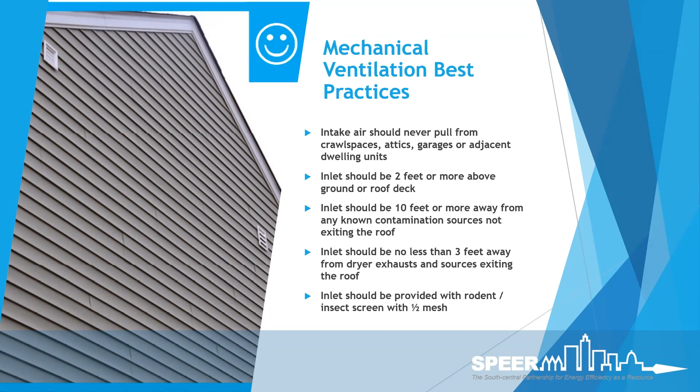So I understand from a mechanical standpoint, it starts to get hard on where you can put these that's not going to be causing some kind of issue. But once you find that sweet spot, do that on all the houses. And that's what a lot of them do. Once you find that, it's going to be dropped into a closet somewhere and pushed out the sidewall. It'll be away from any bath fans, away from any kitchen exhaust, away from the garage door, away from the exhaust from the tankless water heater. It's always the best practices for that. And again, it's in the IMC, but not in the IECC.

And then load calculations. This has been required in the code for a while. I'm still surprised of cities that don't require these at time of permit and application. It needs to be with the energy model that Manual J calculations and Manual S calculations have been done. It is just right size of equipment for that house based on its climate zone and based on its air changes per hour or tightness of the building and window U value and heat load through the building and insulation. All of that takes into consideration of, is this something that needs to be for the mechanical for sizing?

I just found this yesterday on site. It's kind of a real easy color coded. We're mostly all in Texas in either the red or the orange. If you look at that, that means we're in zone 1 or 2. If I look at a 3-ton for both zone 1 and 2, it should be a 1,500 to 1,800 square foot per ton. So right sizing of the equipment, I mean, this is just a rule of thumb. It's not something that's always going to be this way. It's based on air tightness and load calculations of the building. I just found this online and thought it was kind of neat that they broke it down into these color codes.

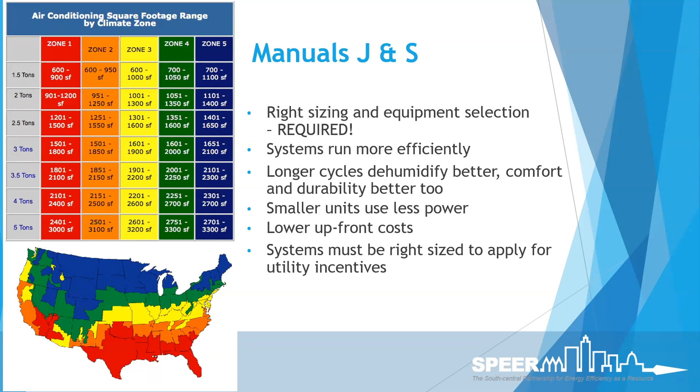This is an example of the Manual J load calculations. It shows BTUs. Usually they're done in block load, which is the whole building. It's not done room by room. You can sometimes get that. Energy Star sometimes asks, I think they'll ask for that in their checklist, room by room instead of just a block load. But you got the heat gain, heat losses through the building in BTUs, as we talked about earlier. Many factors make up that.

So as you see on the left, it's skylights, it's windows, it's doors, it's above grade walls, partition walls, below grade walls, ceilings, passive floors, exposed floors, slabs. All of that needs to be taken into consideration to base it on how much do I need. And of course, orientation comes into play. I had someone ask just the other day, the builder wants to give me one Manual J for this one house, not depending on orientation.

Well, with code, it doesn't really specify that you need more than one, but really with code in IECC, each building needs to have its own. Well, if it's always the same, you're going to keep producing the same one as long as the address is correct. But with Energy Star, it says, show me all orientations. And if it's 6 kBTUH different, then I need a new load calculation only for that one. So let's say west is the worst. Then I need one for west and then one for all the rest.

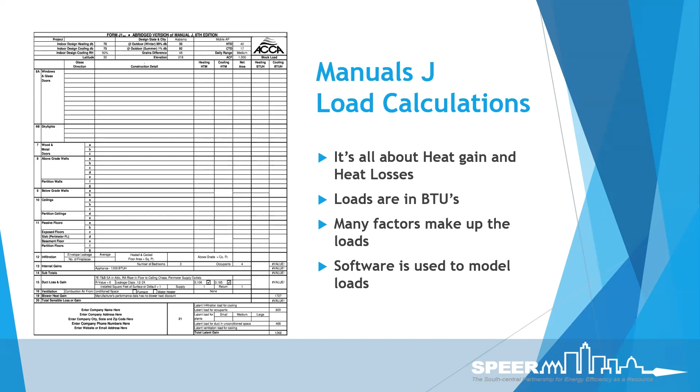So technically, if you're a city and you say what's correct, my thing is every single house needs to have a load calculation. They should not just be doing a blanket for that. But at the very minimum, it needs to match with the address, the square footage, the window coverage, the R-value. All this needs to be the same. And the orientation should be listed.

This is one from Wrightsoft. It's just a different version of the Manual J. To me, I like the fact that it looks a little different. It has categories you can look at. I've still to this day seen design conditions being changed to actually get higher and larger equipment because maybe the homeowner says that's what they want. Doesn't make it right.

Here, this is Fredericksburg, Texas. They're using San Antonio's International Airport as its weather data. The design conditions for winter is 32 outside. The summer is 97. I've seen people move that to 103 or 104 or 105. And these may not be accurate. I mean, it may be 99 now for that particular location. But you need to look at what is my design conditions for that climate zone using that weather data. If you go 103, 104, you're oversizing the equipment on purpose. And as a plan reviewer, you should see that and go, this doesn't look right.

I don't know of any real climate zones right now that's over 99. Everything is 99 or less for summer. And what that's doing is telling us that 99% of the time, it's going to be below that degree. Yeah, we're going to have days it's 106. That's the 1%. And you don't want to design to 1%. You want to design to the 99% for best efficiency criteria. When you get at 106, it's outside of its design parameter.

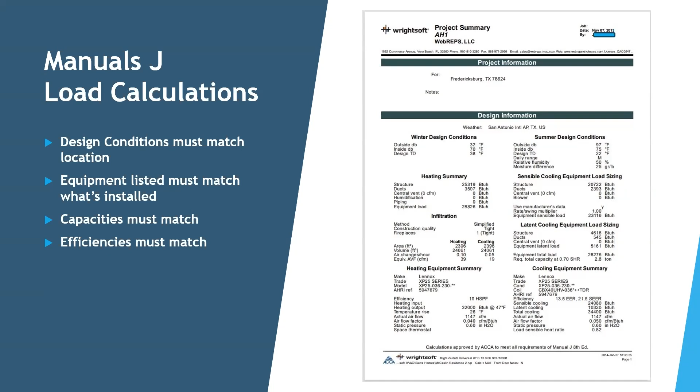The system may not keep up and the homeowner may complain that it's not conditioning properly, but it's outside of its design parameter. If you have a 3-bedroom house and they have 7 people in it, that's outside of its design parameter. They're going to have issues with comfort, but that's not the fault of the system. It's the fault of just the occupants being more than it's allowed and/or able to condition based on its load calculations.

And then, of course, the equipment, they put manufacturer's model numbers on here. This also should be verified. Is that what's being installed? Because when you get these Manual J and Manual S, these are preliminaries. These are projected. This is what's supposed to happen. Doesn't mean that's actually what is going to happen, and you need to make sure, is that actually what happens? And if it is, then it meets that requirement.

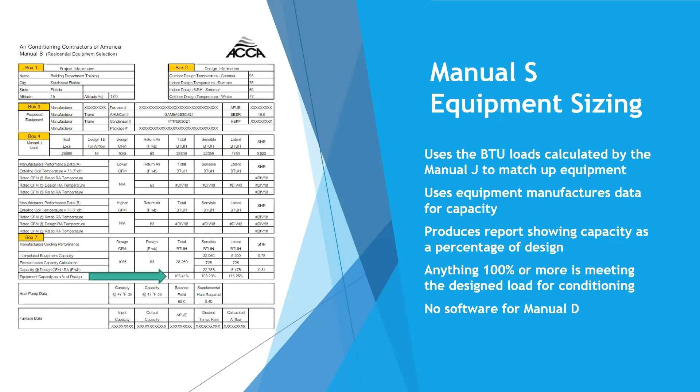If they change it because the supplier was out of an outdoor condenser and they went with something else, did it change the tonnage? Did it change the SEER? Did it change the output? And is it going to meet load still? You need to verify that.

And of course, lighting is now 100% high efficacy with the 2021. It was 75 for 15. It was 50% for 09. 18 was 90%. Now 21 is 100%. And of course, most people just use LED everywhere, which is meeting that high efficacy lighting. But how else do you get more energy efficiency out of 100% high efficacy lighting?

You put controls in. And so 2021 and beyond, we're going to see this more and more, but there's a lot of cities that will amend these out because they don't think that it's ready for that. There are exceptions, as you see: bathrooms, hallways, exterior lighting, lighting that's designed for safety and security is exempt from controls. But living rooms, kitchens, formal dining rooms, these things should have occupant sensors, timers, things like that will shut it off so it doesn't run as long. That's how you're squeezing more efficiency out of this.

But again, I see cities that don't enforce this. I'm not going to argue the fact that they need to. I know it's something different. I know homeowners may not like it. But it's one of these things that's in the code. It's part of how we're whittling it down to be more energy efficient, is to control how often it's going to run to squeeze even a little bit more energy efficiency out of it.

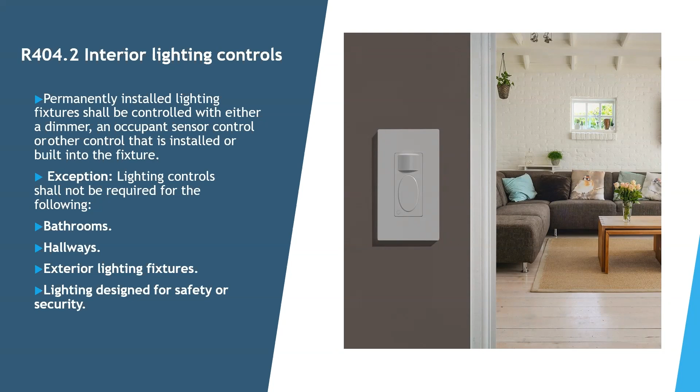So in my opinion, the way the ICC has gone to their adoption and update process, it's brought more people in to have good ideas to be able to meet the demand and requirements and not just keep asking for thicker insulation. So that's all we have for today.